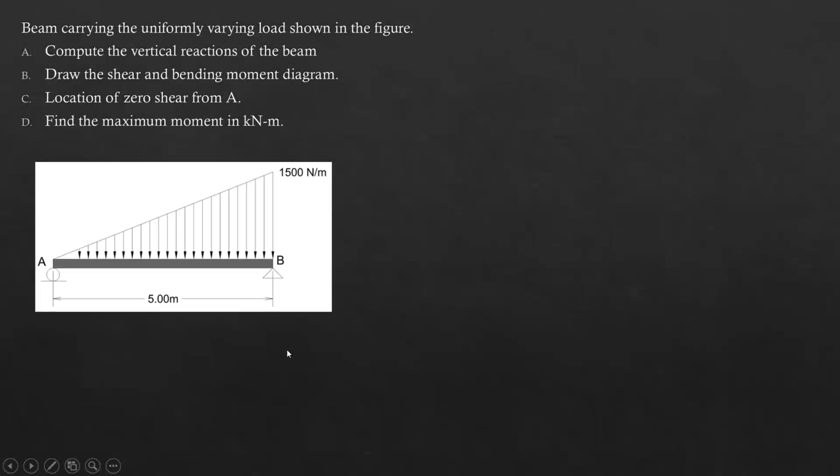Here is our next problem for shear and moment diagram. Beam carrying the uniformly varying load shown in the figure. We need to compute the vertical reactions of the beam, draw the shear and bending moment diagram, locate the zero shear from A and D, and find the maximum moment in kilonewton meter.

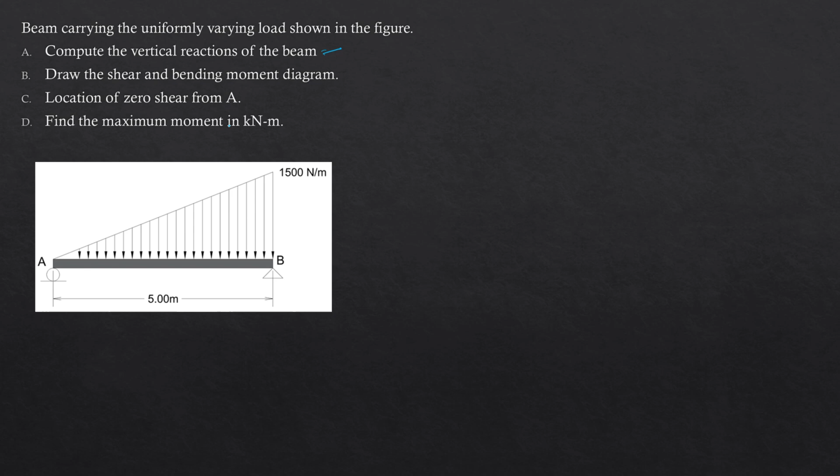So in our beam, the load is a uniformly varying load acting on the beam. First, let's compute the vertical reactions of the beam. This is RA, and here is RB. First, summation of moment at A equals 0 to get RB. Our assumed direction of rotation is counterclockwise.

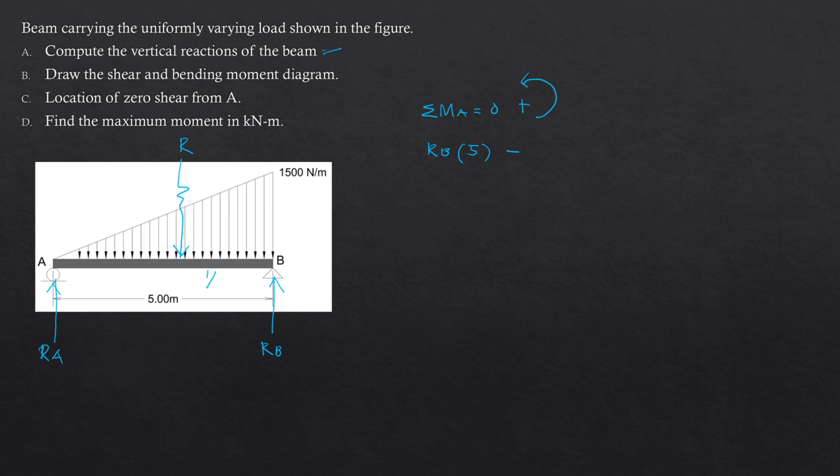So that's our assumption, positive counterclockwise. So RB times the distance from A, which is 5 meters, minus the uniformly varying load acting on the beam. Let's get the resultant. The resultant acts only at one point on the beam.

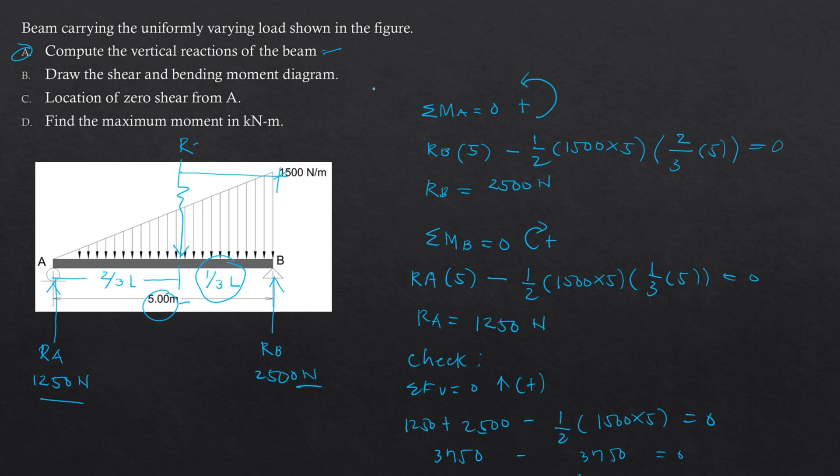That's for letter A. And for letter B, let's draw the shear and bending moment diagram.

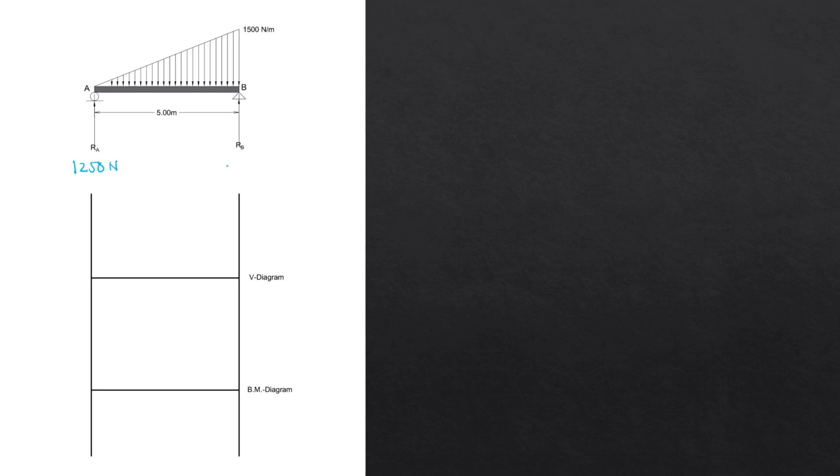Let's place our vertical reactions: at A this is 1,250 Newton, and at B this is 2,500 Newton. So first, the shear diagram.

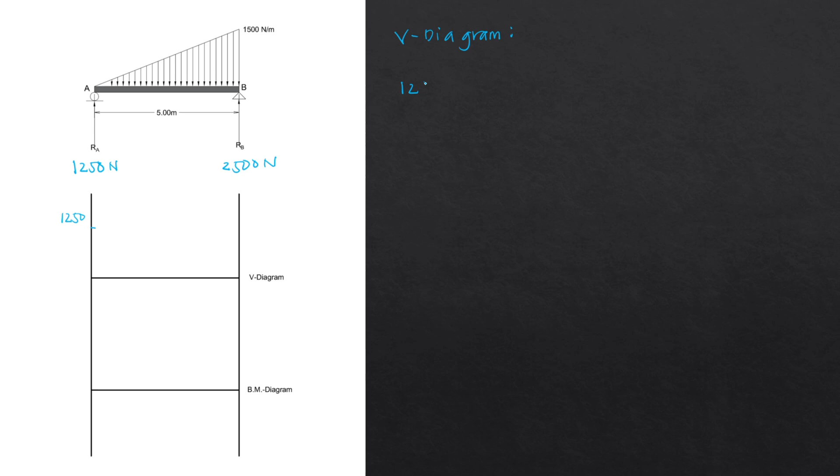Starting from A at 0, we have a vertical reaction at A which is upward, so we go up to 1,250. Then we move toward B, passing through the uniformly varying load.

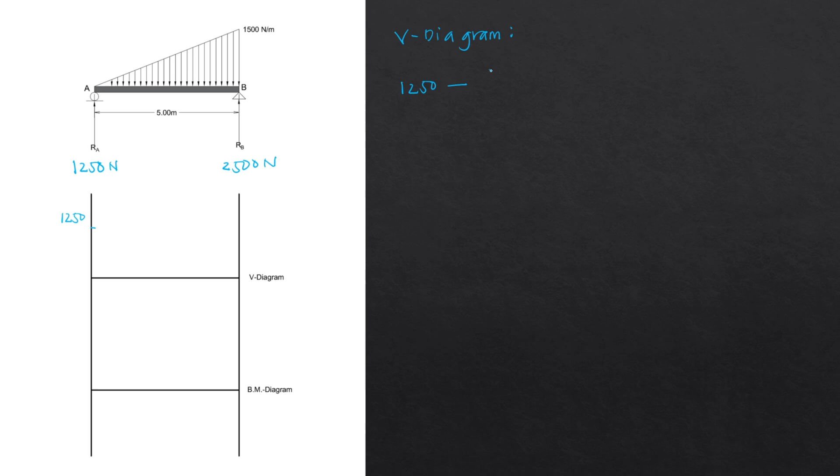So the load there is a triangle. It's minus because it acts downward on the beam. So minus, triangle, 1/2 times 1,500 times the span from A to B, which is 5 meters. Computing this, we get negative 2,500 Newton.

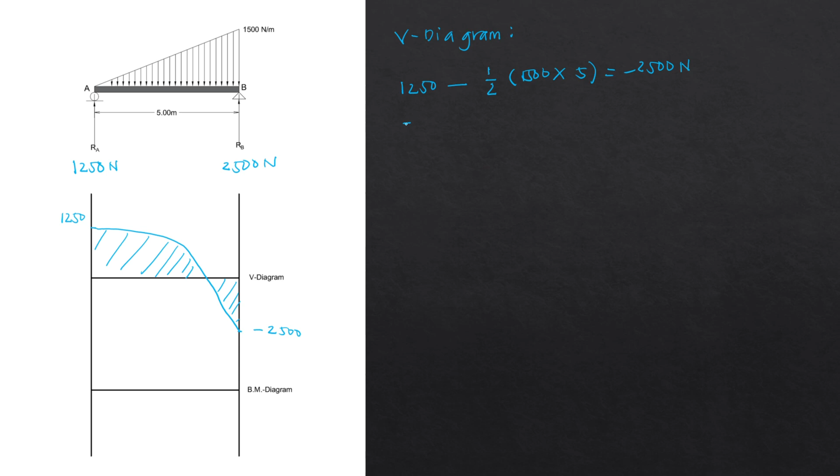Perfect natin, wait lang. Ayan, so parang ganyan. Yung load natin, so negative, ayan, 2,500. And then, para mag-zero yung shear diagram natin, ayan. So, merong vertical reaction dito sa B, upward, so plus, ito 2,500. Compute, so that is 0. So, from negative 2,500, punta tayo sa ayan, 0. So, napag-zero natin yung shear diagram natin.

Lagyan natin ng sign, so ito, this is positive, and then ito is negative. So, sa mga nalilito sa pag-draw ng shear diagram, kapag ganito na yung load natin, ayan. So, kapag ganyan, sa load diagram natin, ayan. So, this is the load diagram.

Recap lang tayo para sa mga hindi pa nalilito. Kung alam mo naman na mag-graph ng shear diagram, you can pass forward mo na lang. So, kapag ganito, nag-act dito sa, kunyari ito yung beam. Tapos ganyan, so ganyan yung uniformly varying load. Kapag pa-decrease, ayan, and then pa-increase, ganon. So, paano mo na i-draw yung shear diagram pag ganyan?

Tandaan nyo lang, kapag ganyan, kapag pa-decrease, from dito, kunyari from 10, tapos 0 to, kapag pa-decrease, ayan, so happy yung pag-ganyan. Ganyan yung pag-ganyan yung shear diagram niya. So, kapag naman pataas, kapag pa-increase, ayan, from 0 to, for example, 10, ayan, yung shear diagram nun is sad na, ganyan.

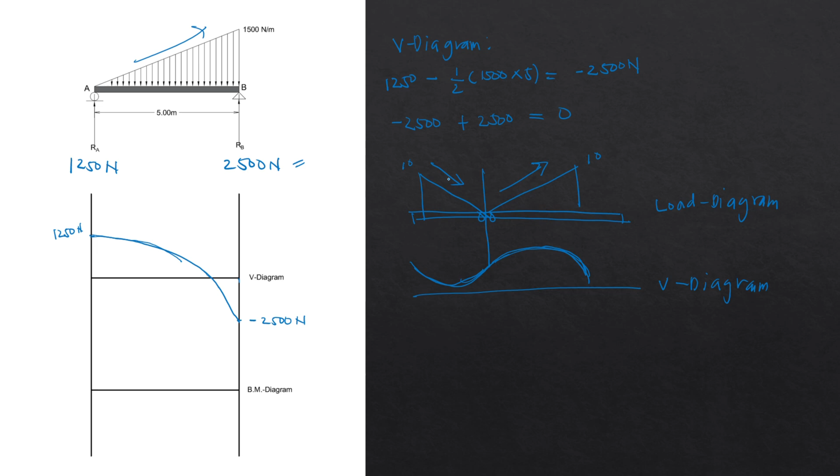Pag ganun na, dito sa load diagram natin, pag ganun, pataas, so increase, yung mag-draw ng shear diagram natin is pag ganun, pasad pag ganun. Ganun siya, so ang tinatandaan ko lang dito is, for example, Victoria's Secret, ganyan. VS, Victoria's Secret, ganun, pag ganun, yung shear diagram nun, pag ganun, VS, ayan, so ganun lang yung tinatandaan ko para hindi makalimutan.

Or V, S, oto, pag ganun, pabaliktad yung S. Or ano pa yung tinatandaan ko noon. So, di ba, kapag yung price, kunyari yung price ng favorite product mo, kapag nagde-decrease yung price niya, siyempre di ba happy ka? Ganon, so happy. And then, kapag tumaas naman yung price ng favorite product mo, di ba malulungkot ka, so sad, pag ganon siya. So, ganun lang yung in an easy way na matandaan.

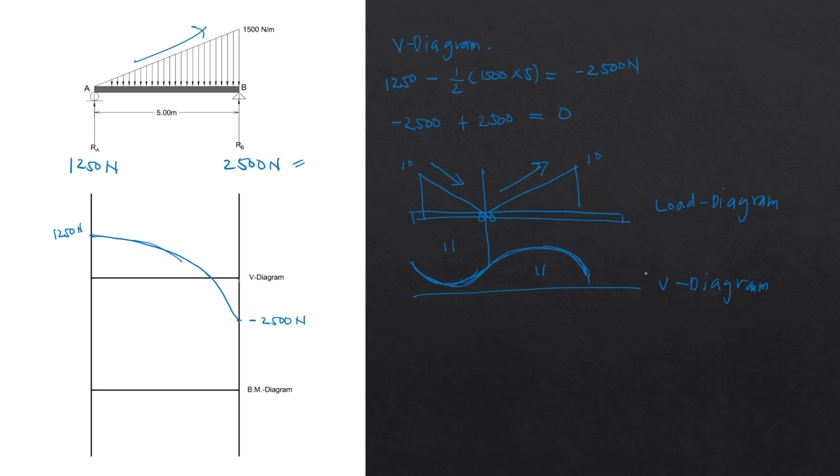Meron namang deep na explanation behind this kung bakit ganito yung, kapag ganito yung load natin, and then magiging ganito na yung shear diagram natin. Dito explain lang natin na mas madaling maintindihan. Meron namang deeper explanation pa bakit ganito yung shear diagram natin kapag ganito na yung nag-act doon sa beam natin na mga load. Ayan, so ito yung shape natin is parabola. So, proceed tayo sa bending moment diagram.

Dito, ito yung shape natin, so yung shape natin is parabola. So, ano ang formula ng parabola? Area ng parabola is, di ba, 2/3 base times the height. So, ito, 2/3 times 1,000. 2/3, 1,250 times, multiply, so ito, kailangan natin kunin pala yung distance natin.

Ito, let's say, x na lang to. So, hindi pa natin alam yung distance dyan. So, dito is 5 minus x. So, kunin muna natin, so next leg lang tayo. Ayan, so kunin natin, solve for x, ayan, x value.

Gamit na lang tayo ng squared property of parabola, or the SPP, ayan. So, di ba, sulat lang natin dito. Di ba ganyan yung shape natin? Lagay lang natin, wait lang. So, ito yung x, and ilan to? 5 minus x. And then yung buo, ito, yung distance nito, 5 meter, ayan, 5 meter yan. So, ilan dito? 1,250, and then dito is 2,500.

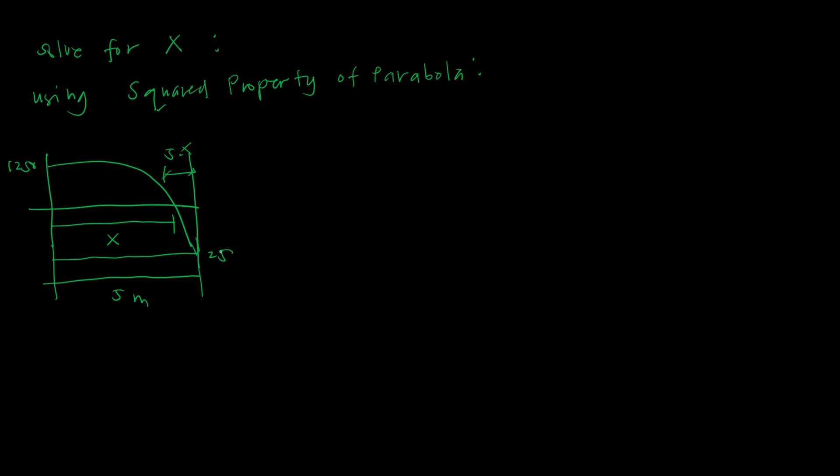So, using squared property of parabola, x squared divided by ito, 1,250, is equal to ito, 5 meter squared divided by yung ito. Diba ganyan? Ano ba? Yung ganito, so this is the x, and then ito is 1,250, so yung buo is 5 meter. And then, yung total na height niya, so 1,250 plus 2,500, so this is 3,750. Ayan, so 5, ito, x squared over ito, 1,250, is equal to 5 squared divided by ito, 3,750.

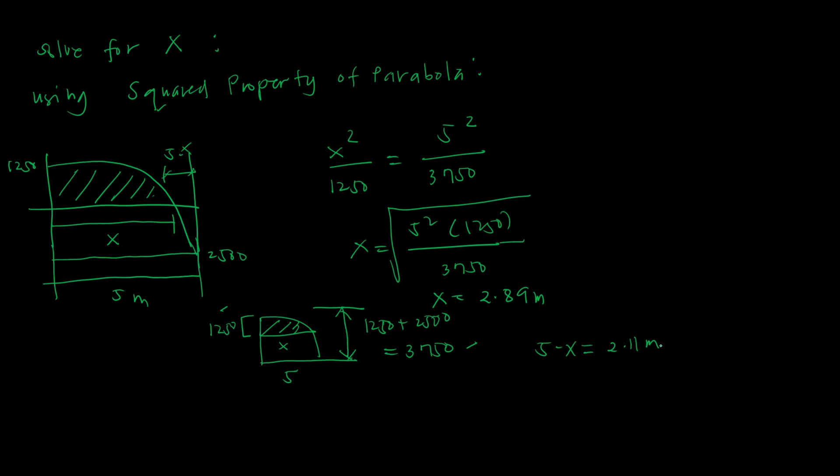Ayan, so square na lang natin. So, 5 squared times 1,250, over 3,750, and then ganun mo na lang. So, ang mapapalabas natin na sagot dyan is 2.89 meter. And then, ang 5 minus x natin, this is 2.11 meter. Ayan, so nakuha na natin, ayan, so lagay natin dito. So, x, 2.89, and then dito is 2.11.

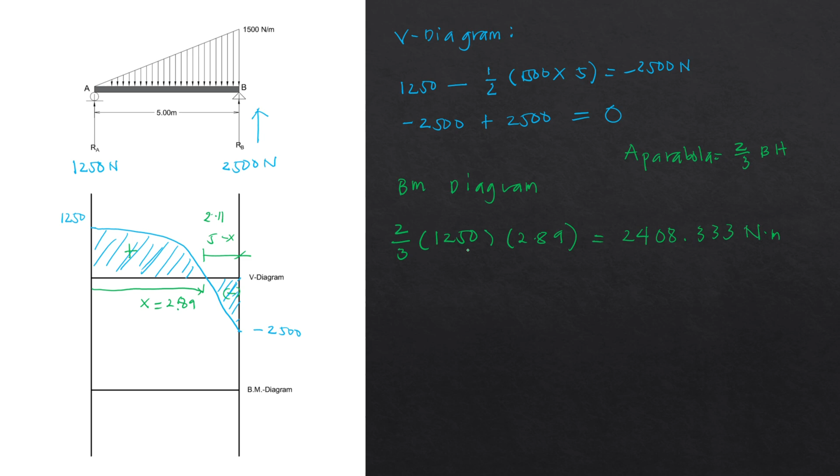So, 2/3, so this is, diba ito yung shape natin? Ayan, parabola. So, 2/3, so 1,250 times 2.89, ito, so that is 2,408.333, 3 decimal places na tayo. So, 3 and then Newton meter. So, 2,408, so dito.

So from 0, since dito sa A, wala namang moment dyan. So mag-start tayo sa 0, and then ganun tayo. So this is 2,000, hanggang dyan. Palitan natin ng kulay. So this is 2,408.333.

And then i-minus natin ito, yan, ito. So yung iba, napagkakamalan na spandrel yan. So area ng spandrel? So formula, 1/3 base times height.

So itry lang natin, so kapag napag-0 natin ito, meaning yung shape na to is spandrel. So 1/3, 2,500 times 2.11. So makukuha natin dyan is 649.9 or 650. So meaning hindi natin napag-0.

So meaning ito na shape na to is hindi siya spandrel. Ayan, so kunin natin yung area niyan. So paano yung pagkuha ng area diyan? So ito delete natin, erase natin. Erase natin yan, so hindi siya spandrel, so kunin natin.

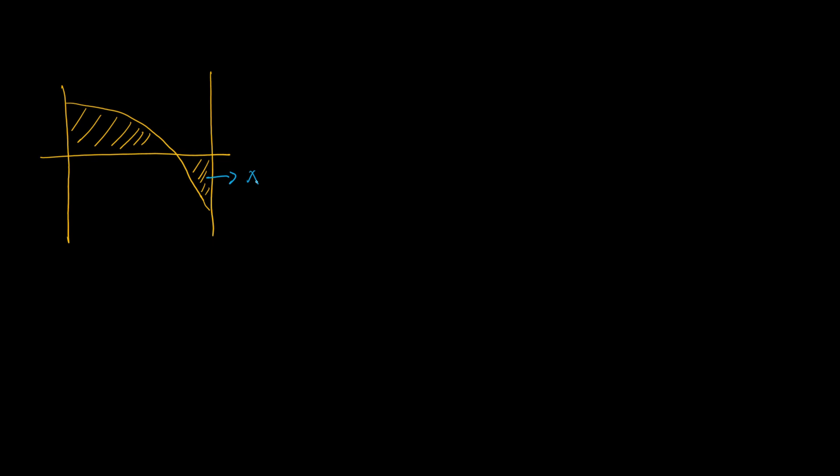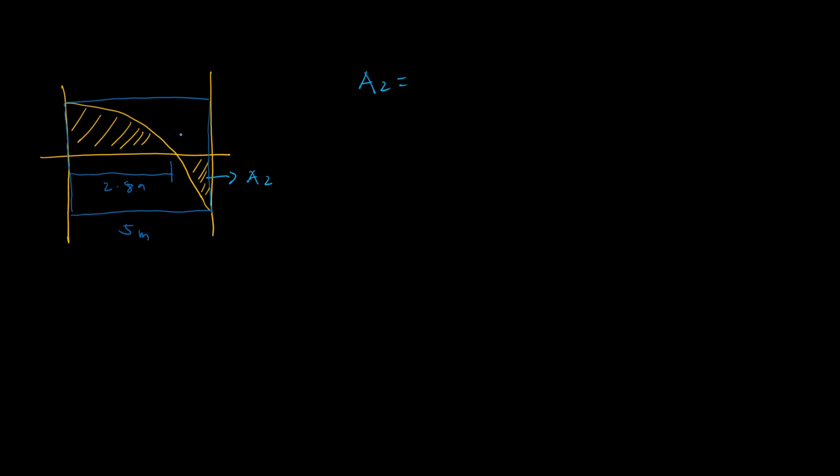So ito yung area 2 natin. Area 2 is equal to ito muna, yan yung buong yan, rectangle yan. So ilan ba to? So this is 5 meter, di ba? Lagyan natin distance, ito is 2.89 and then ito is 2.11.

So dito this is 1,250 and then dito is 2,500. So yung buong rectangle, yung total height nito is 1,250 plus 2,500, so that is 3,750, and then yung distance niya, yung width niya is 5 meter. So ilagay lang natin, ganyan, so this 3,750 and then ito 5 meter.

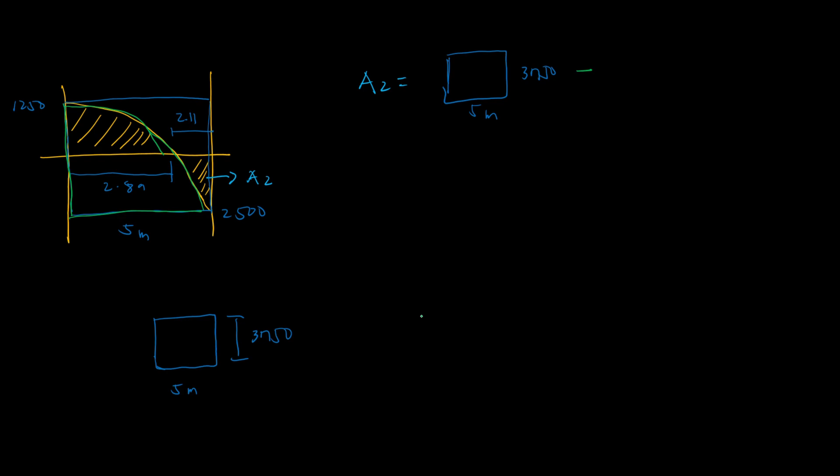Ayan, and then next kunin natin ito, i-minus natin ito, malaking parabola. Ilan ba yan? So di ba yung parabola? Ito, so 5 meter din to, and then yung total height niya, ayan, so total height niya is 3,750 din.

So ilagay lang natin dito, 5 meter, and then ito is 3,750. And then i-minus natin ito, minus ito, area, let's say area 3, ito. Yan, so minus area 3, so yung area 3 natin, kunin lang natin.

Area 3, diba ito yung ito muna, palitan natin ang kulay. Ito yung maliit na rectangle. Ilan? Ito yung total distance niya is 5 meter, and then ilan yung buong ano ito? So 1,250.

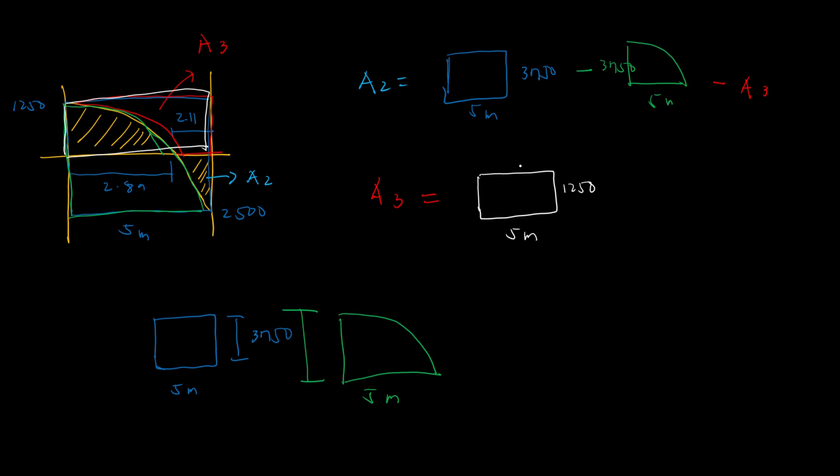And then i-minus natin itong maliit na parabola, so minus yung parabola natin na 1,250, yung maliit lang, so that is na ganun. So this is 2.89. Ayan, so ilagay lang natin na ganyan, bigyan natin ng shape para mas ma-visualize nyo.

Ayan, so kunin natin, di ba, 2/3, so this is area 2 is equal to, dito na lang, yung area 3 muna. So area 3 is equal to rectangle, di ba, base times height. So 1,250 times 5 meter, and then i-minus natin yung parabola, so that is 2/3 ng 1,250 times 2.89. Ayan, so area 3 is equal to 3,841.667 meter squared.

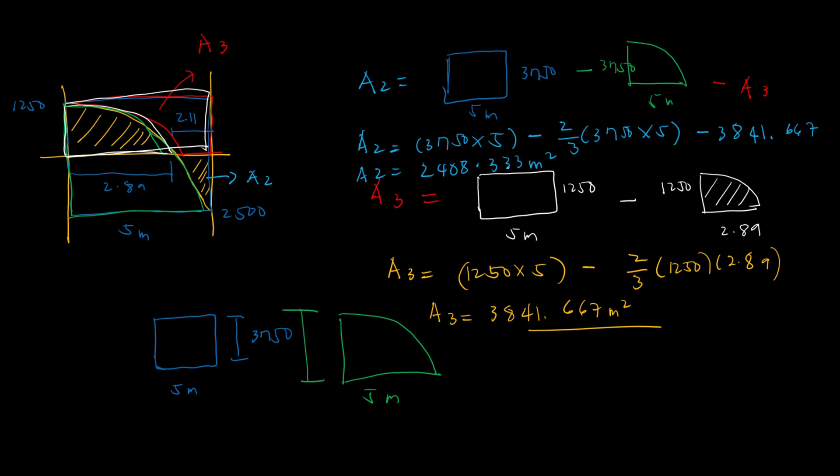Ayan, so now kunin na natin yung area 2. So area 2, ayan, so ito, base times height, so 3,750 times 5 meter minus 2/3 ng 3,750 times 5. Minus yung nakuha natin na area 3, so that is 3,841.667. Ayan, so now area 2 is equal to, ilan to? 2,408.333 meter squared. Ayan, so yung area 2 natin is ito, yung area 2,408.333.

Ayan, so pwede na nating kunin, ayan, so minus area 2. So ilan yung value niyan? So 2,408.333 minus area 2. So 2,408.333, so it's equal to 0.

So ganyan yung bending moment natin. Ayan, so napag-0 natin, so meaning tama yung mga reactions natin, and then yung shear diagram. And then meron pinapahanap sa atin.

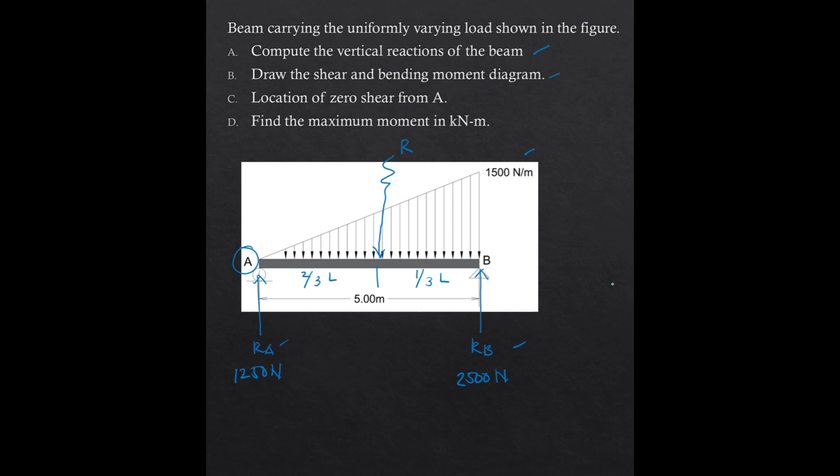So dito, location ng zero shear from A. So location ng zero shear, so from A, so hanggang dito ay ito. Iba natin ang kulay. So dito nag-0 from A, ito, so this is 2.89. So letter C, so location ng zero shear, so 2.89 meter.

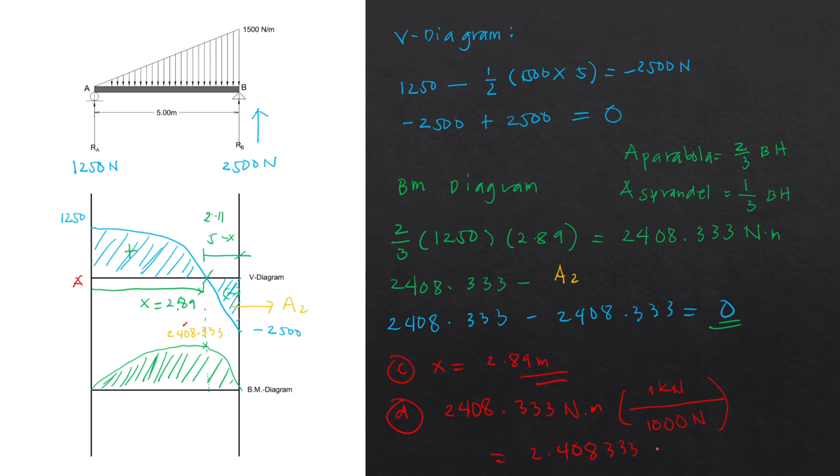And then letter D, ano letter D natin? Find the maximum moment in kilonewton meter. So maximum, so ito yung maximum natin, so that is 2,408.333 newton meter, so i-convert natin siya into kilonewton. So 1 kilonewton ay equivalent lang siya sa 1,000 newton. So compute, so that is 2.4083333 kilonewton meter. Ayan, so yan yung sagot natin for D.